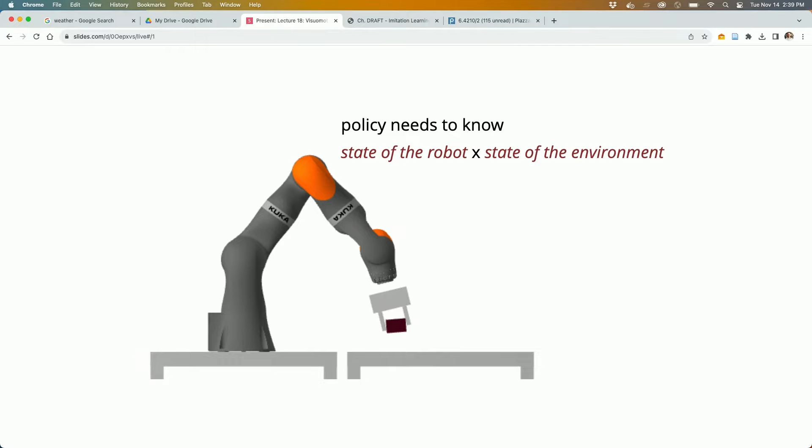And maybe surprisingly, it takes time to fully appreciate how baked in the assumptions are in those results, the fact that we're only controlling the degrees of freedom of the robot. Those very strong results really relied on that assumption in a very specific way. You can actually still write those exact same equations down if you include Q to be the state of the brick and the state of the robot. They're almost exactly the same. I still have a mass matrix, there's still a Coriolis term, there's still a gravity vector. All of those are true.

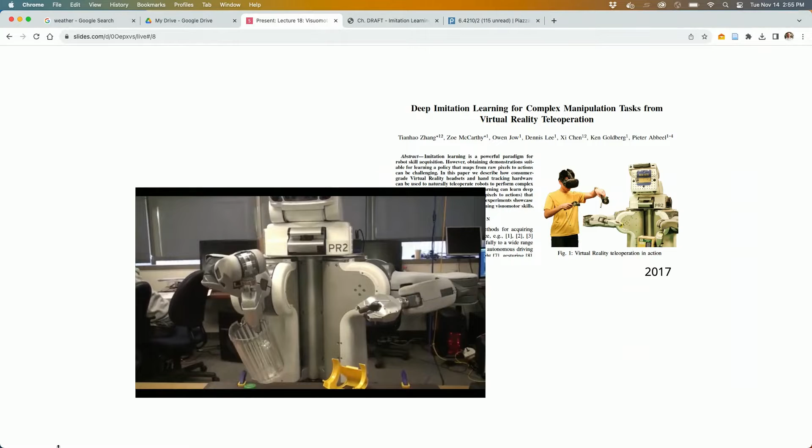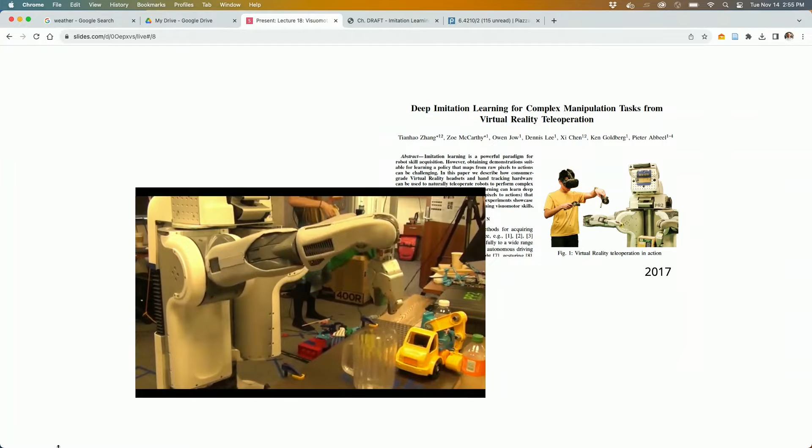And the PR2 made a splash, actually, because that first video, which I showed in the first lecture, of the PR2 going in and doing all the things you might want a robot to do in the house, it was teleoperated, but it's extremely capable. Okay? There was a recent competition, actually, one of the X Prize competitions. It's called the Avatar X Prize.

It was roughly a teleop robot competition. Can you make a robot that could do all the things with a remote teleop? And actually, you didn't get to supply the pilot. The judges were the pilots, and they had to don your system, and it had to be usable enough that it could go through a series of challenges, and you could communicate with another human through the robot. You could defuse a bomb or open a, there was a handful of things that they did. But this actually, again, pushed the technology pretty dramatically.

So this was one of the winning, NimbRo was the winning competition entry. That's actually Jerry Pratt, who was the pilot that day. He was one of the judges. And I believe this is the winning run, because Jerry was the winning pilot on the winning run of that competition. Okay? But they started developing really nice teleop interfaces, doing highly non-trivial things with their robots.

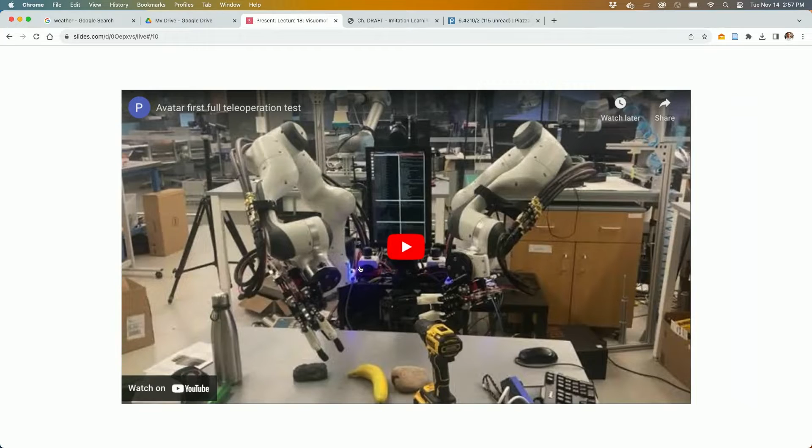Okay, another one of the entries in that competition was done by Northeastern. This is Peter Whitney's group at Northeastern. I got to go over and play with this one. It's super cool. Fairly dexterous. You could just put on these sort of haptic gloves, put on the headset. You can be in the other room, and you can do amazing things, right?

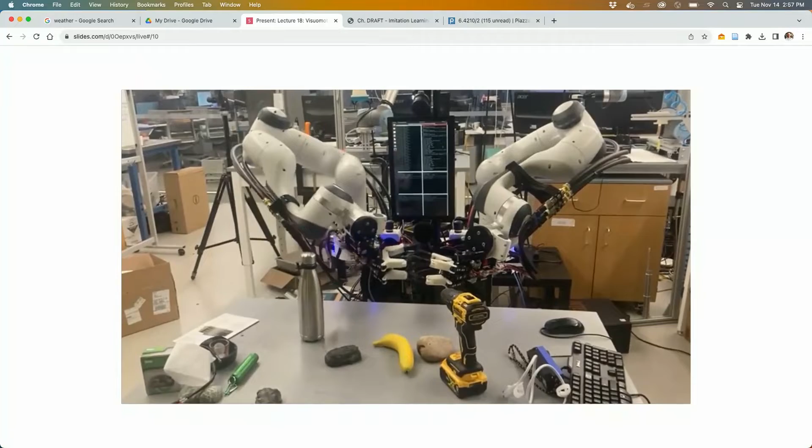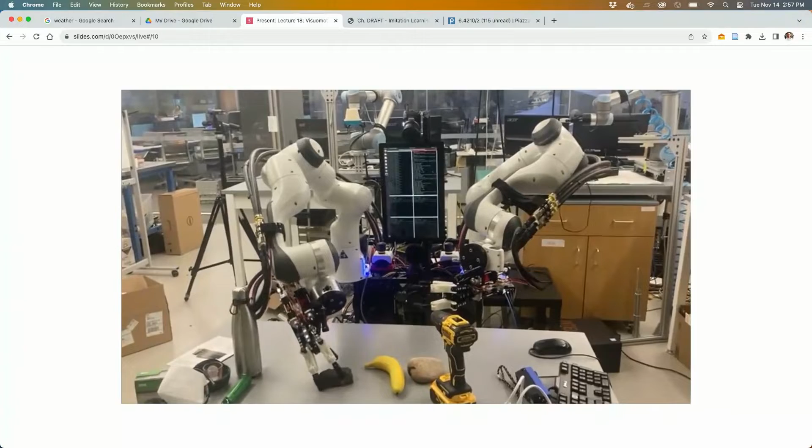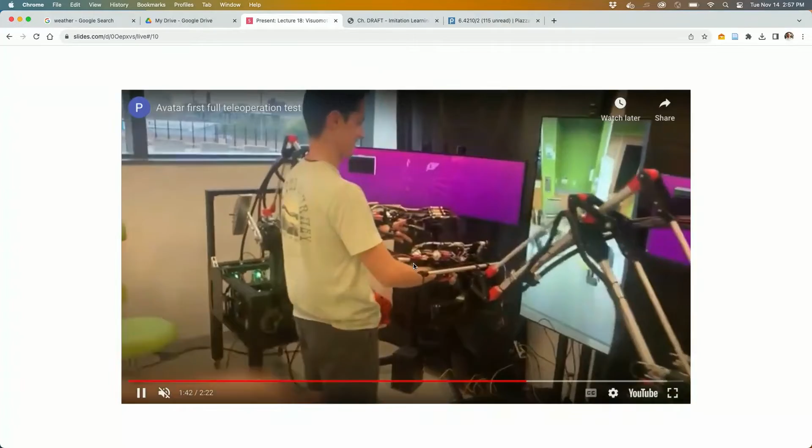So there's like a disconnect between saying how hard the problem is in this way, and then how easy it is when you just let a human go on the other side, and they can do most of the things we care about. That's what the device looks like, yeah? Some of them have haptic feedback, right? So this one, you can actually feel the forces that the robot is feeling. Yeah?

So to some extent, we've been able to teleop for a really long time. There have been teleop interfaces to robots for many, many years. I think we now have smaller robots that have force control and can give haptic interface back. So I think the robots have just gotten better. But we've known how to teleop for a long time. I also think that VR got better, right? So people have more and more immersive interfaces. And there's continued research on that to make that even better.

So if we wanted to, we could bring the robot future maybe by just having enough people wearing enough goggles, okay? But the hope is maybe that we can capture what's happening through this interface, do some learning, and turn that into a controller that we can use and the human can go home, yeah? So the great thing about having these interfaces is that control becomes a supervised learning problem.

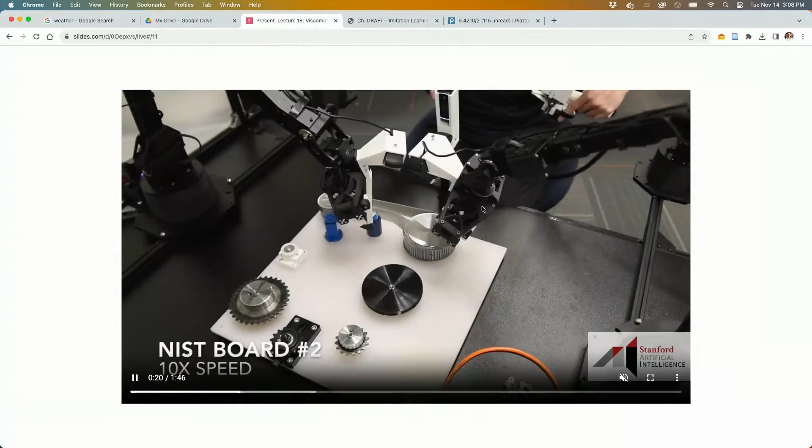Okay, yeah, and I guess that's actually a perfect transition. So, here's one more cool teleop that started up. This is actually Aloha, which is from Stanford, and I think it's good for many reasons, but one of them is that it's low cost. Some of the systems I showed you that have haptic interfaces are pretty expensive. This one is low cost, surprisingly low cost arms doing surprisingly dexterous tasks. Some of you were at CoRL and maybe got to play with it.

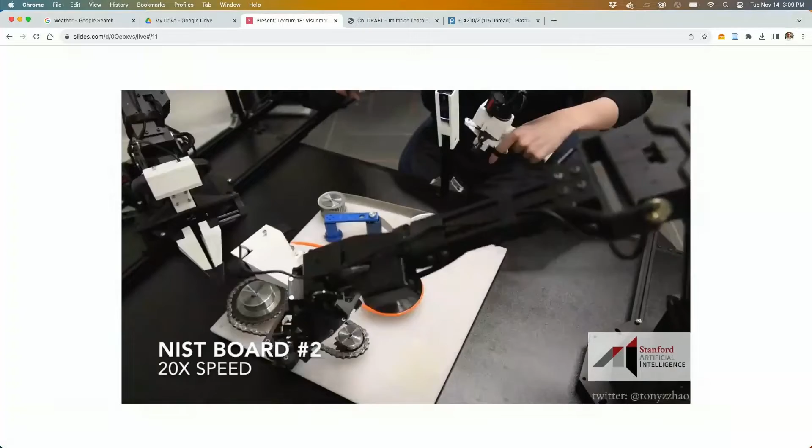Anybody play with it at CoRL? Yeah, cool. Did you like it? Was it pretty effective? Yeah. So after I said something about tying shoelaces, I think all my students were trying to tie shoelaces with it, and I don't think they quite managed. But my job is safe for another year.

Okay, so here's the point that we were just talking about. So what is the architecture behind this? Oftentimes, this is sort of the way they started in 2016, the first people that were trying to use deep representations in that control layer. Oftentimes, there is a big network, like a ResNet, pre-trained on ImageNet, for instance. And then you have a relatively smaller control network. These tend to be surprisingly small, a few layers, a few hundred units in the middle, 256, 256, 256 kind of thing, okay?

But the essential point here is that when we were doing perception before, we were always saying that the output of this, in order to put it into our classic control, needed to be somehow interpretable, right? We chose key points because I could write a controller that took key points and made decisions based on that. I chose pose because I could reason about that directly. And here, there's a map all the way from pixels to torques, if you will. Probably not torques. Probably this is still going to go into a low-level manipulator control. But the cheeky word for it is pixels to torque.

All right, and the middle is not required to be an interpretable representation. And I think that's just such a big deal. That really breaks free into a different class of representations, which are learned from data. They are sufficient to accomplish the task, and they need not be interpretable. It removes a big burden.

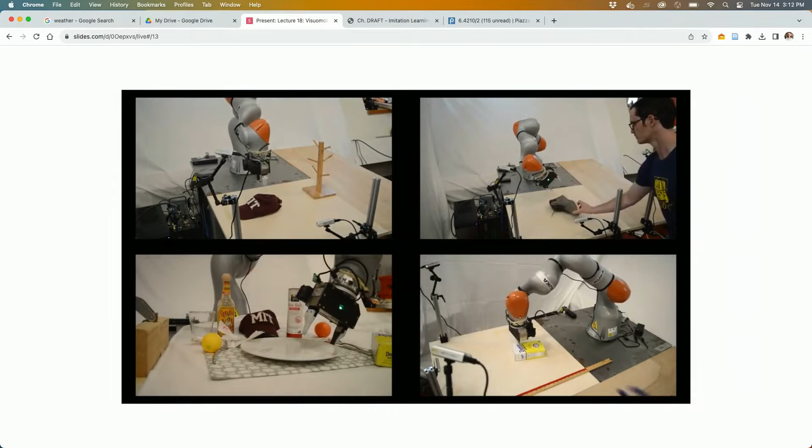Okay, I started playing with this. So people were, Sergey and Chelsea and others were doing it starting in 2016. I'd say we started more in earnest in 2018 in my lab. This is Pete Florence, Lucas Manuelli, and Yunzhu were working on this too. Okay, but they started trying to take the dense descriptors that we learned about last time and saying, what if we used dense descriptors for that Z and close this visuomotor learning with sort of imitation learning?

Okay, and the results that came out of that really were deeply influential for me. The controls were robust in ways that I had not seen controllers be robust before. I think basically because they were closing a loop on the RGB sensors directly. And we never had high rate feedback control based on cameras before that. And seeing that work and seeing you could just shove things around and it had a very robust response was deeply influential in the way I thought about control. Okay?

So let me tell you a little bit about how that works. Okay? So the idea there was we take that latent representation Z, which was arbitrary pre-trained feature. Oh, sorry, go ahead. Sorry, in the network that you showed, is it basically at this current frame of sensor inputs that I have, this is the current output, or is there like a time element? Right. So the original image didn't actually have history.

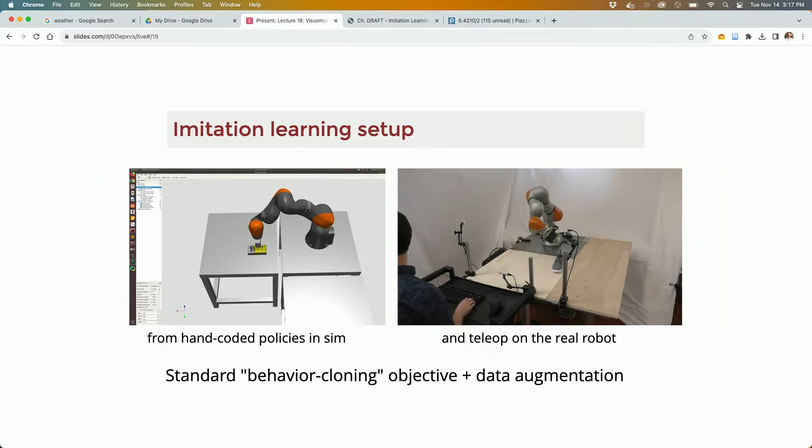This is actually a very simple teleop interface. Pete would sit right in front of the robot, use the mouse and keyboard, okay, put the shoe, random shoe, in the relatively random orientation. You can also behavior clone from a simulation. I'll make another point about that in a minute, okay? But imagine just sitting there and doing that 200 times, let's say, okay?

It's kind of a small cost if the thing you get out is awesome, right? But in this case, this was just to make sure we understood the behavior cloning pipeline instead of having to do that every single time when we were debugging all the parameters and everything. Pete just wrote a simple controller in simulation, and then made that give demonstrations and made sure that they could clone the existing controller into a neural network controller. Just kind of shake the cobwebs out, okay?

Okay. Now, in this case, the controller was not a history of observations. It was using a recurrent network, a small recurrent network, LSTM, about 100 hidden units, and it was doing in simulation from simulated cameras some basic sort of box pushing, flip the box kind of tasks.

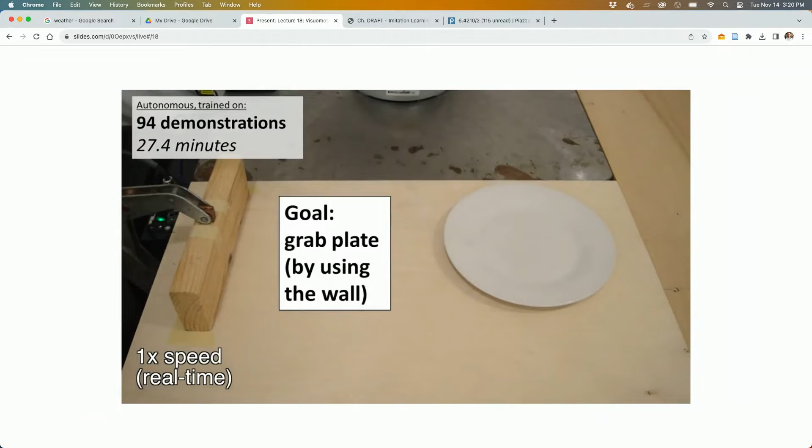Now, the dream of foundation models, I guess, is that you get your data set big enough that basically everything is interpolation, right? That's what happens maybe with GPT. Okay. Yeah, I can't say enough how impressive this was to me, right? We've had humanoid robots doing cool things, but somehow this was just like, what? I can't believe this worked so well.

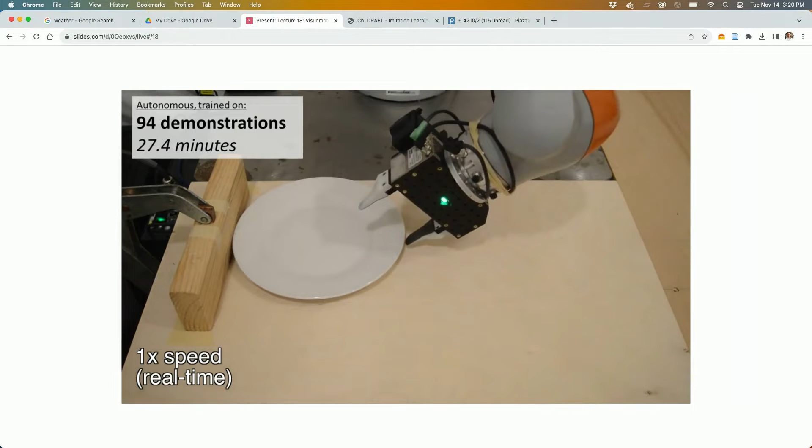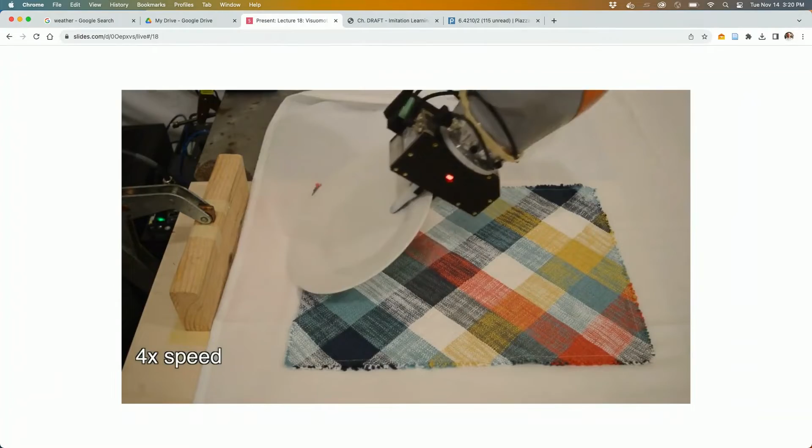So, picking up the plate, okay, but then I thought, well, surely you'll be able to antagonize it with visual distractors, right? That you just change the visual scene, the thing's going to completely fail. But I don't know, it was trained on ImageNet. It had features that were somehow robust to a lot of the visual. He didn't give demonstrations with all this stuff in it, right? But the rollouts were surprisingly robust to visual distractors. Okay.

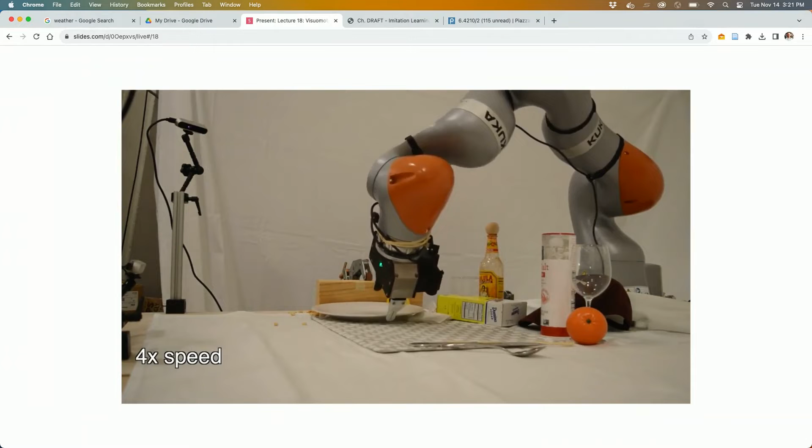And really, you could go in and antagonize that robot, and it would almost always get the job done. Now, this was sort of an early version of something that I thought I couldn't model very well. Like the hat, it's not super deformable, but it's deformable, right? The state of that is non-trivial to write down. And the task here was just always put the hat on the rack. But there's no notion of estimating the state of the hat anywhere in this pipeline. And it can still do the task, right?

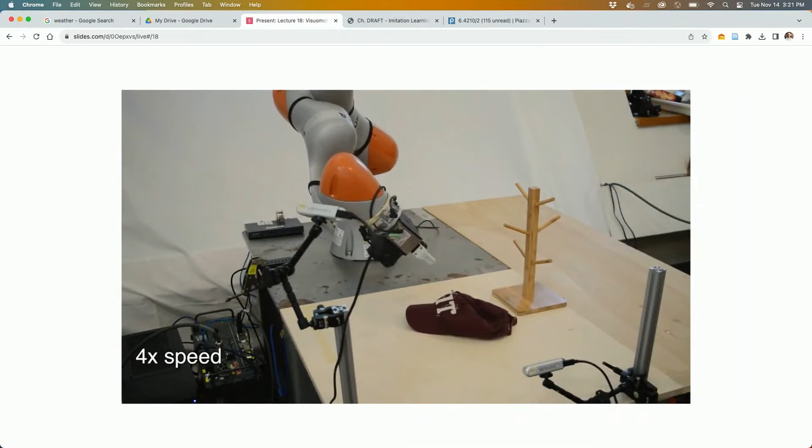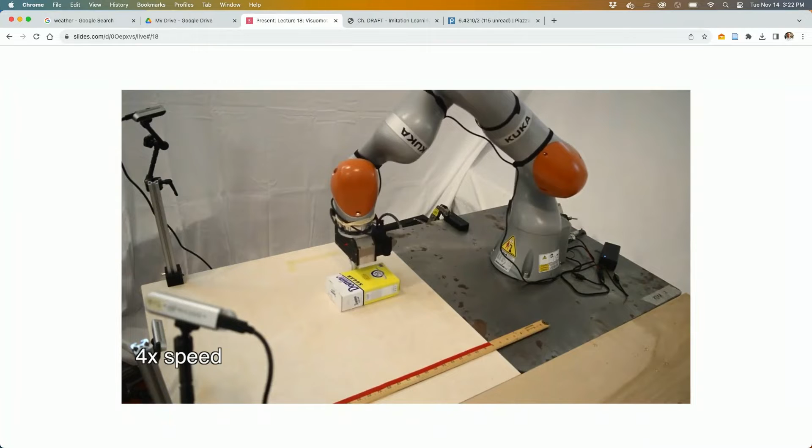Humans could do the task. Maybe that shouldn't be surprising, right? But you can teleop the task. Maybe you can play it back. This is 51 demonstrations. Like the things it's doing are not that complicated, but the ability to close the loop on the cameras is just so valuable.

Okay, so it's actually kind of a trend, all right? A few years ago, everybody was talking about reinforcement learning. People are still doing excellent work on reinforcement learning. There's lots of work to do, but it is maybe surprising how many people are excited about behavior cloning these days, right?

These models are able to consume lots of demonstration data. People are willing to give lots of demonstration data, find ways to get it off YouTube. And a lot of the best manipulation systems today, certainly in terms of demo quality, are actually coming out of these behavior cloning pipelines. Anybody disagree? You're welcome to disagree. Yeah, it's surprisingly effective.

Okay, so we actually did some work at TRI about this. This is kind of the new push that we've been doing there. I linked to the blog post if anybody wants, but I have to show you some of the results that have been coming out here.

Okay, so because we spent so much time working on simulation and on model-based control, we decided to start working in TRI about, we've always picked challenge problems, and we basically said, let's focus on tasks that we cannot simulate, where the model-based control, the same thing I said here at the beginning, right? So I want to focus on the tasks that really estimating the state is a non-starter, right? So we started doing a lot of tasks with food, with deformable things, okay?

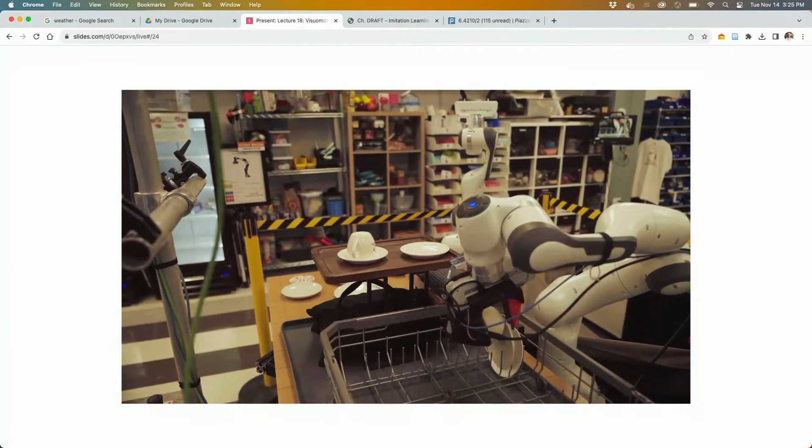And then you remember I talked a lot about the dish loading project, okay? So Naveen one day just said, oh, I'm going to go ahead and try to do dish loading with this new behavior cloning stuff. And basically in 3 hours, he did what took us 3 years to do previously, and it's pretty darn good. In the sequence learning sense, you might worry about tasks that have really long duration. This is a pretty long duration task, and it's being captured in these big models.

I noticed this one has the spongy visual tactile thing. Did all the others also have a lot of tactile sensing? Yep. So not all the others. So the egg beater, for instance, the bimanual setup doesn't. There are some tasks that really benefit from the tactile sensing, and I'll show the video of that in a second. But there's some tasks that really benefit from that, others where it's not so big.

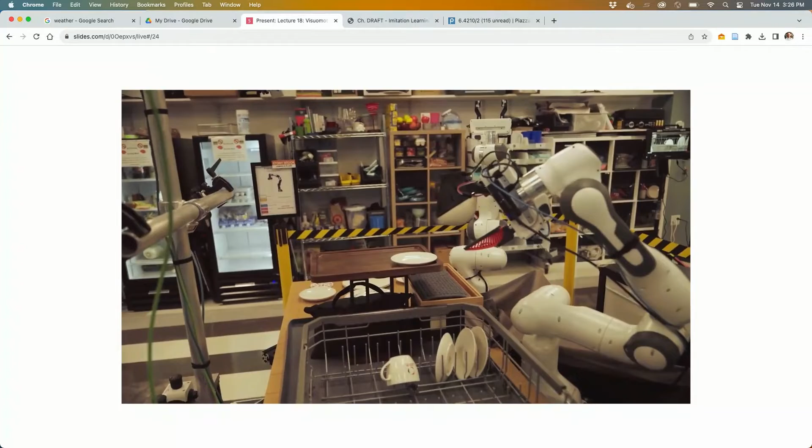So there's two things. Let's separate. In one case, there's a different set of inputs for the human. So one question is, does the human feel the forces? Okay. The egg beater, the human needed to feel the forces, but that was using the joint torque sensing and relaying that back to a haptic teleop interface. Okay. There's another thing, which is, the robot always feels the joint torque sensors, but this one, when they have the bubble thing on there, then they optionally get a higher resolution force and geometry sensing at the interface. And that gives additional tactile information to the robot for the controller. Yeah.

Direct output from the bubble to the model, or did you feed the like? Yeah. It was the image, another image in. Yeah. Sorry, one more here first.

No, Naveen teleoped that task 50 to 100 times. I think one of the big things that's happened with the diffusion version, which I'll tell you that story, is that it used to be that a lot of the behavior cloning demos required expert demonstrations, and they just barely worked. But we've gotten to the point where now it's much easier to give the demonstrations and get good results out, for some subtle reasons that you'll see in a minute.

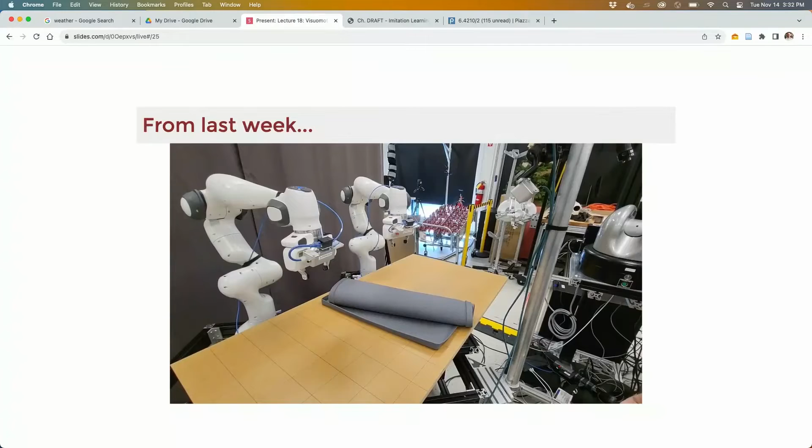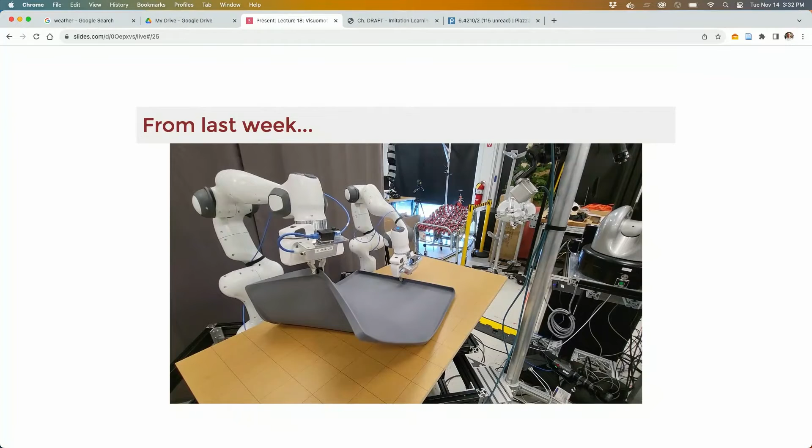Cool. So the cool thing is that now we're just trying to see how we're going to build many skills. Some of you came and visited. The Graduate Women in Robotics group came and visited just the other day, and we showed this sort of demo. But basically every day there's new skills.

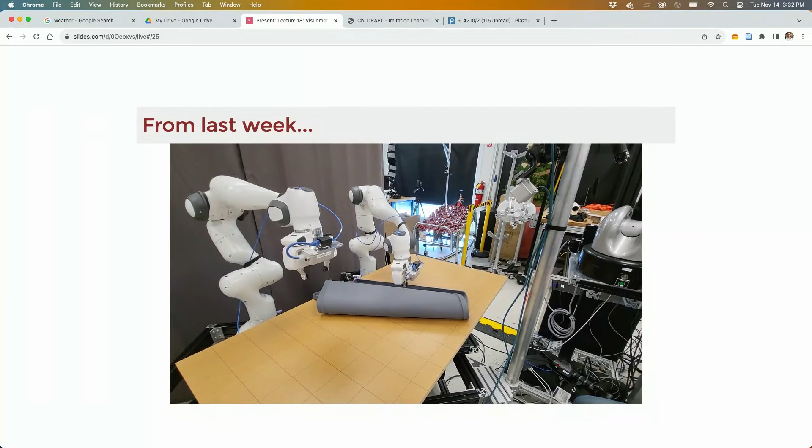We actually now have a full-time robot demonstrator. It's a job, right? It's a great job, actually. Try to come up with something that you can do with 2 hands that involves some props. My favorite ones are the ones that don't involve rigid objects, right? And be patient enough to get 50 to 100 demonstrations. Let the GPU train overnight, and then you come back the next day and you see this kind of thing coming out.

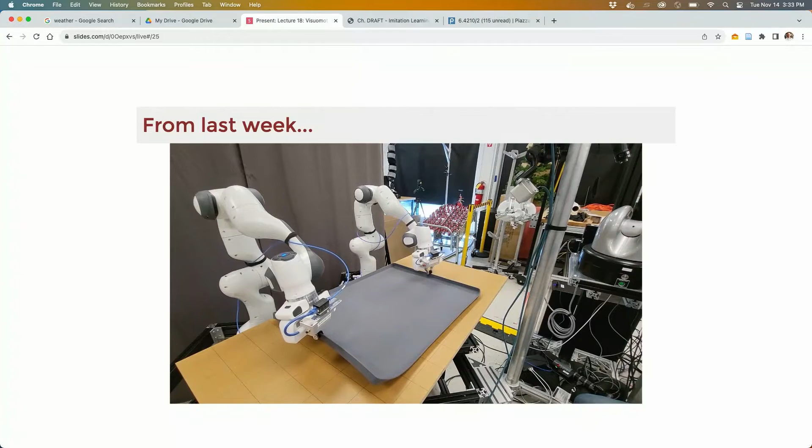Okay, let me tell you a little bit about, oh, go ahead, yeah. Just quickly, how do you do the training? You were saying like there's a mouse. There's a couple different interfaces, and I think we're still revving on that. The simplest one, the one we started a lot with, was just a space mouse.

I don't know if you've ever seen these space mice. I could bring one in. They look like a little hockey puck kind of thing, and it's a 3D mouse, basically. You can do XYZ, and then you can also click the button and then do yaw, pitch, roll. And it tends to give sort of rectilinear motions, but a capable operator is very capable with a space mouse. They were meant for CAD initially.

But then there's also, I'll show you the video of the human demonstration for the bimanual, it's actually a big bimanual haptic feedback device, which looks more like a robot you're hooked up to. Yeah. Yep. Yeah, increasingly people are excited about that. What's the name of the new Meta thing where you can have huge monitors, right? That's pretty good hand tracking. I wouldn't be surprised if people start doing it.

I mean, you won't get the haptics that way immediately, but there's new work out of CMU just the other day that has like gloves that have actuators inside. The stuff's happening so fast, it's incredible. So I would not be surprised if we're all wearing VR goggles and teleoping robots soon.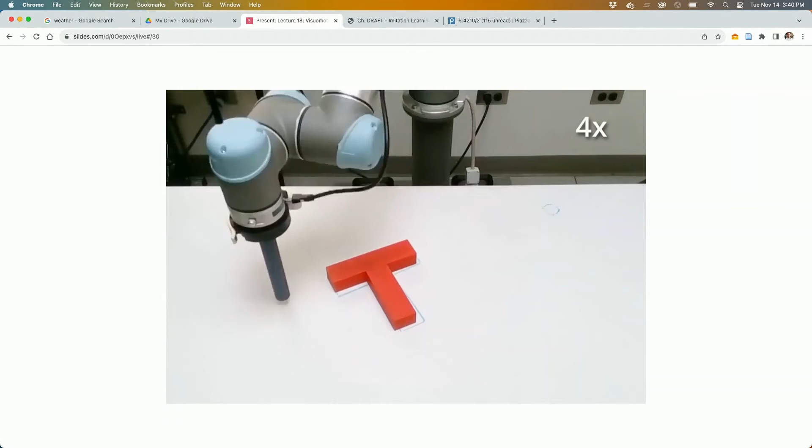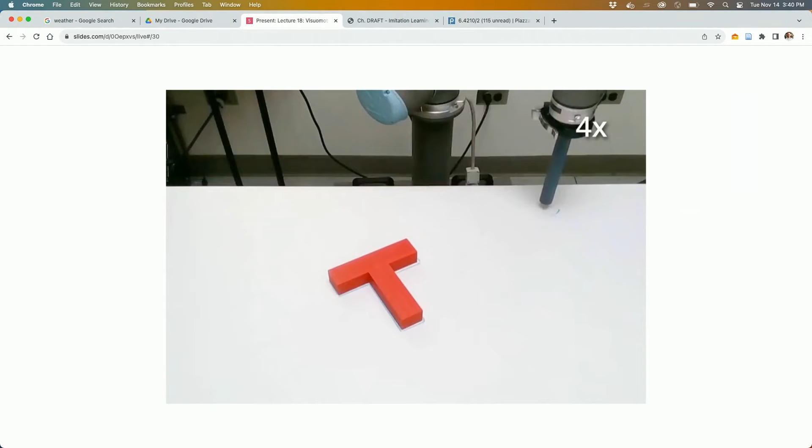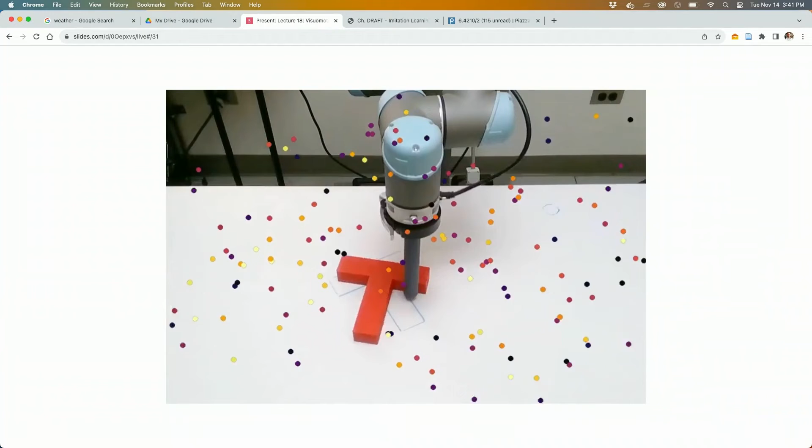Okay, so now the denoising is going to come up with a trajectory for the robot. So conditioned on the image, it's going to try to denoise to a set of actions for the robot. So it looks like this. It takes random noise, a random possible trajectory, and it does that same denoising to come down into a coherent set of actions that were conditioned on a small history of observations. That's the architecture, okay?

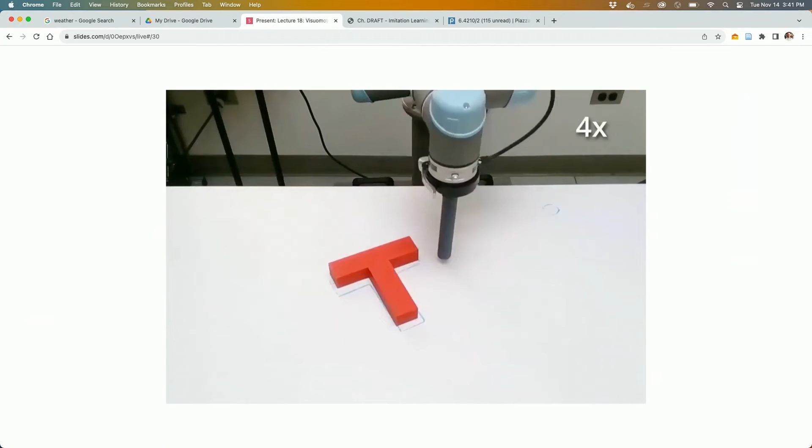So this is going to the questions about history of observations versus RNNs or whatever. The way this is set up, it's a dynamical system, right? So it's a control policy. It's a sequence learner, if you will. It has a sequence coming in, a sequence going out, and it's set up to be an autoregressive model. So in the language of dynamical systems, if you wanted to implement this as a system in Drake, it's an autoregressive model where it takes the history of observations and actually also its actions.

The interesting thing is it's actually predicting a sequence of future actions. The policy that I wrote over there just takes maybe a history of observations and then predicts the next action. And then you run the history of observations, you predict the next action, okay? This is actually predicting many actions into the future for a very subtle reason. It works better if you do that, okay? For very subtle reasons.

So the architecture is doing this sort of denoising diffusion. It takes a small history of observations, predicts those actions. The perception head is pre-trained on ImageNet, okay? A lot of the denoising diffusion, like in stable diffusion and the like, are using UNets for the bottom half. We are using them also here. I don't know if that's fundamental or not. I think it's fundamental in some of the success in images. I'm not sure if it's fundamental here yet.

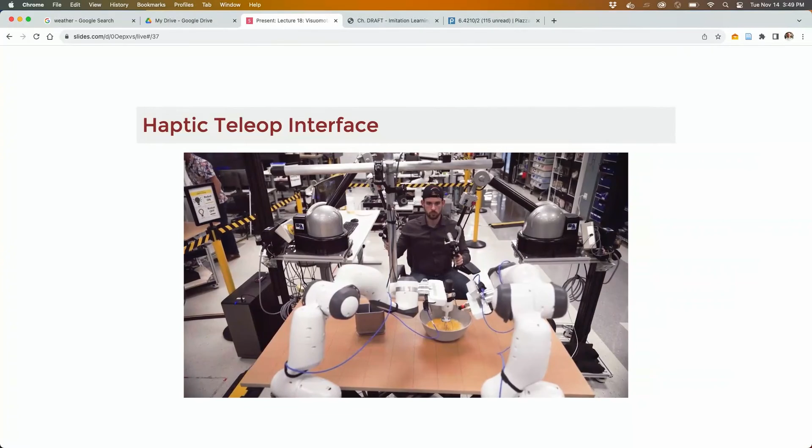All right, so let me just show, so here's that haptic interface. So this is Eric. These are called Haptions. They have like bike handles for user interface. You got to drive it just yesterday. But Eric gets to feel the forces that the Panda feels, and that makes all the difference for being able to do that constrained motion demonstration.

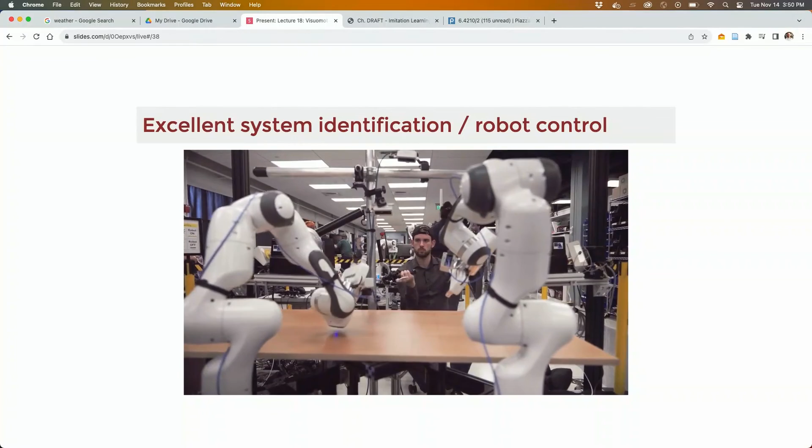But these are not low cost, unfortunately. They are expensive. All the control we did, the manipulator control, was essential to make this work. Okay, so this has got all the best controllers implemented very well. So in the setting where we know where the table is, then there's guardrails that say don't let the human demonstrator slam the robot into the table.

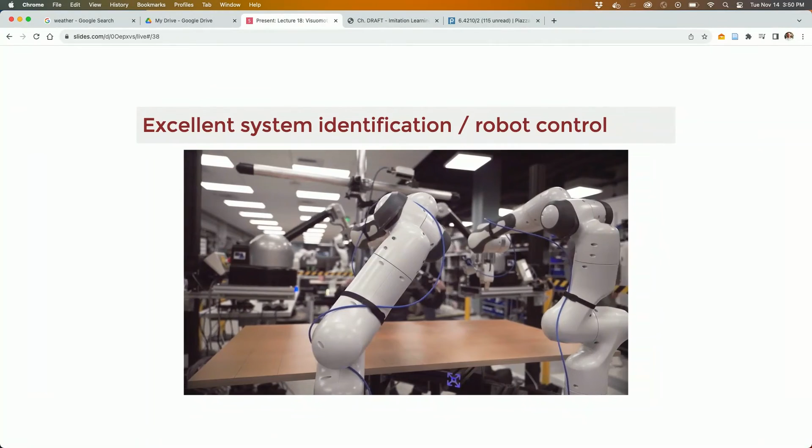So that's self-collision avoidance, which is pretty subtle to get right on a bimanual setup. You have to make sure your robots are synchronized very well in addition to knowing their state. Kevin said to me the other day that you can tell it must be working well because the robot's not scuffed up, right? If you look at a robot demonstration like this, a bimanual one, if it's got scuff marks all over, then okay. But that makes a huge difference to making these things work.

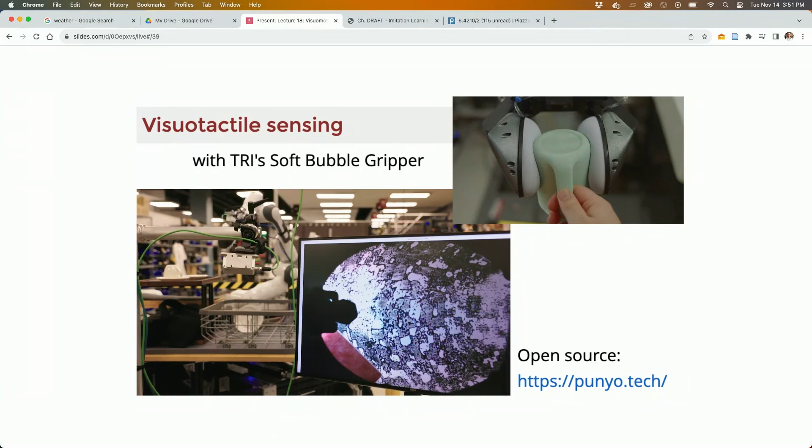Here's the bubble sensor, right? So there's a camera inside those bubbles, and it's textured on the inside so that you can use the camera to detect shear forces in addition to penetration, which would be the normal forces. And there are some tasks where that's really useful. That extra resolution that you get of having not only a higher resolution sensor, but right at the point of interface with a tool or something like that.

The one that we talked about in the blog post was actually when you're using a spatula to flip pancakes, okay? And then someone comes in and moves the table down. The nominal one that doesn't use the bubble sensor will just kind of sit there and try to flip pancakes and just be an airball over the pancakes all day long. But the one that used the bubble sensor learned a controller that actually went down until it touched and then moved forward. So then you can move the table down, and it was robust to that perturbation in ways that the original one was not. That's just one example.

Yeah, so this is an exciting time. Everybody's trying to scale these models. Some people are trying to pool data. Some people are trying to watch YouTube, whatever. We're trying to give lots of high quality demonstrations on complex tasks, and see if something exciting pops out the back end, where we ask it to do a task it's never done before, and it's learned something fundamental hidden in that vector z to do a new task. So we talked about that as the language conditioned policies.

I don't know how many tasks we're going to need. This is one of the biggest questions in the field, and I think it depends on how clean your data is. It depends on how high quality your demonstrations are. Depends on how diverse your robots are. There's lots of things that are going to affect the answer to that.